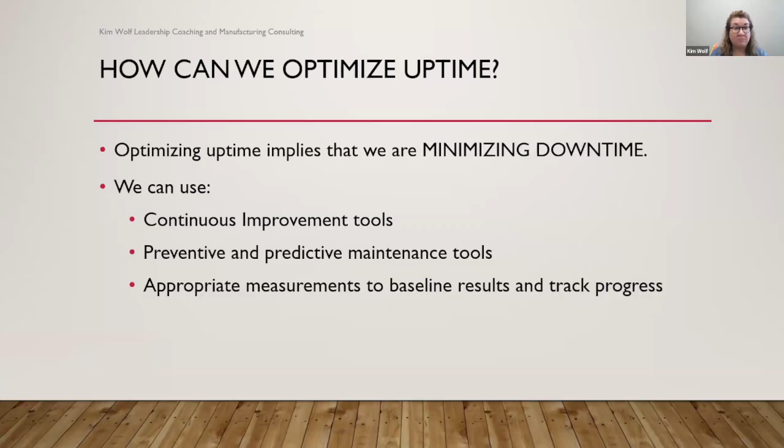I remembered reading in MRO magazine a few months ago that 68% of businesses in Canada experience unplanned outages at least once a month. And the value of that costs Canadian businesses about $242,000 per hour. So that shows you how impactful downtime can be.

In that same article, which I have a link to here on the presentation if you want to go back and read it again, it talks about industrial businesses needing to aim to really get rid of that high-risk run-to-fail maintenance approach that so many of us still use, and go to more of a long-term strategy. You're going to improve reliability, business reputation, and of course, ultimately make money. And that's what we're all here to do.

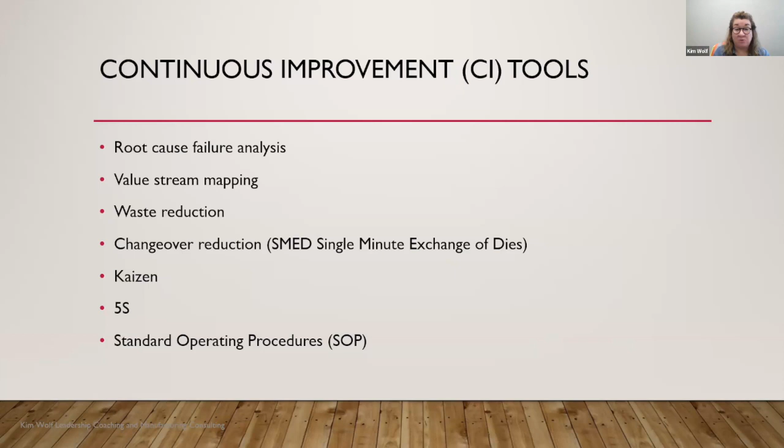Okay, so some of the tools that we're going to talk about today - again, I don't expect all of you to say, oh my gosh, I've never heard of that before. These are all tools that are very common and are out there, have been used for decades, but oftentimes we forget that they exist. I'd encourage you to think about, even if you're at stage 3 or 4, think about one tool that you think, that's something we haven't done in a long time, or that I'd like to try - I just need to get some focus on it to get it started. As we're going through these, think of at least one tool that you think you'd really be able to implement into your business tomorrow, and get started.

So root cause failure analysis, or RCFA, that to me is a very fundamental foundation tool that I have used for a very long time. And in fact, I've used it in my personal life for many years.

I have two grown sons who will tell you the story that when they were growing up, that word 'why' became a dirty word in our house because I just used it so much in asking them questions. And people, once you start using this thought process of the 5 whys, you end up doing it without even really thinking about it. It's absolutely statistically proven that once you get to that 5th why, that truly is your root cause. So many of us say, gosh, I got to the 2nd why, or the 3rd why, and I think I've got it. But when you look at it from maybe an outside perspective, looking in on those problem statements, those problems that have occurred, oftentimes you haven't reached that true root cause.

You think you've reached the answer that you thought it was going to be before you started the analysis. And once you really push through the entire process of the 5 whys, you can see that it may be something completely different than what you had originally thought of. And that's the beauty of RCFAs and 5 whys.

And then once you get to the end, asking, have I fixed it forever? Is there an opportunity for this problem, this issue, to reoccur? And if there is an opportunity for that, then maybe we didn't get to the true root cause, or maybe our subsequent action plan that we had isn't specific enough.

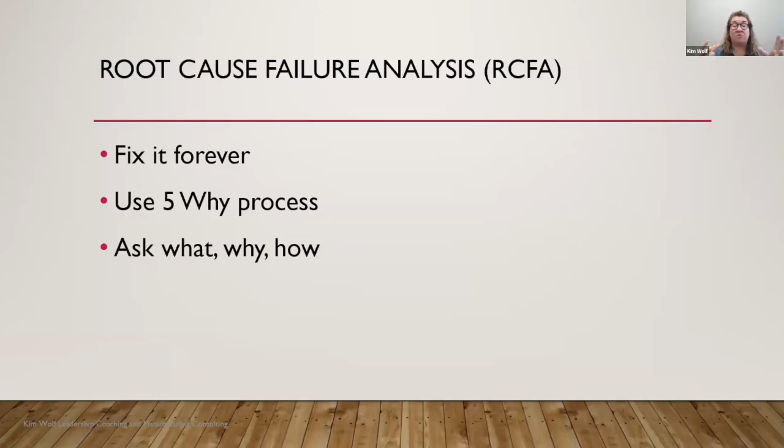I typically will set a parameter. It might be that you have an hour of downtime or more, or it might be 30 minutes, or 10 minutes. It depends on where your baseline is that you're starting. It might be that you have any quality holds or any safety issue that you have, you would do a root cause on. But you have to set those boundaries of when will you do them. Otherwise, you could do 10 of these a day, and certainly the impact gets diluted.

Part of the root cause failure analysis program is this proverbial fishbone diagram. I think most people are very familiar with this, and it's a very good tool to learn how to do it. Once you start doing them, you will think through all of these questions in your mind without even having to write it down or have a team meeting about it. For example, you would have product losses, some loss that you had, and then you would go back through and do all of your 5 bones on the fish. It helps you just to make sure that you didn't forget something.

It also helps you to make sure that you're validating the things that are not the problem. And so what's left, that's what you do your root cause failure analysis on, of course. But the things that are not a problem, it's also good to know that and to make sure that you can check that off as we're good with that.

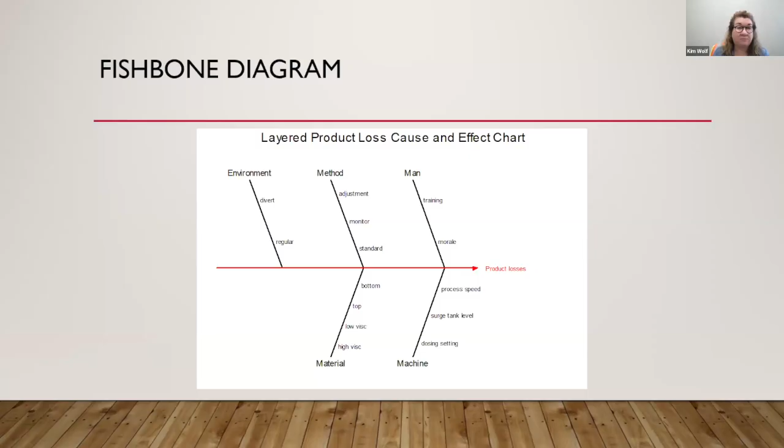The next tool we're going to talk about is value stream mapping. Really, value stream mapping is about optimizing your material flow. And it doesn't necessarily have to be raw materials - it could be a lot of different things. It could be people, it could be equipment, it could be actually ingredients. So we want to look at our entire supply chain, really.

I have one of the clients that I work with, and they are a large, almost like a millwright manufacturing shop. They were starting to do some work for a customer, point A to point B, but there were lots of times where they would have roadblocks that would come up and they would have too many of a certain part of the assembly in one spot, and it just shut everything down. There were other times in the process that things were so open that people couldn't - they were just waiting for something to come to them. So we did a value stream map on that.

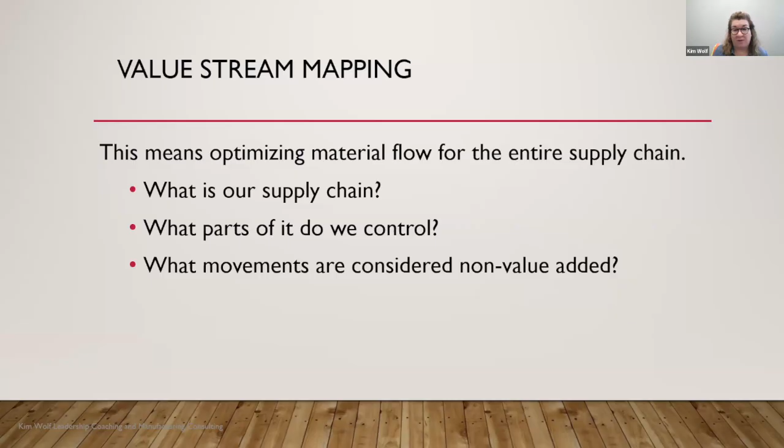And we looked at what are the things that we can control. Then we started to put emphasis on what are the things that are non-value add. For example, if you have a forklift that makes a trip from the warehouse empty, that would be considered to be a non-value added activity. If you're on the highway, your transport truck returns empty.

So when you're looking again at your entire supply chain, that would be something from a transportation perspective that you may want to investigate. Or let's just say that you have a maintenance person that walks to the storeroom to get parts repeatedly, as opposed to having a world-class maintenance program where you have a work order planner in place and they have all of the parts gathered together and put in a bin. The maintenance person gets the work order with the parts and they've got all the tools they need. They go do the job and come back. So those are the types of things that you want to try to get to when you're looking at a value stream map.

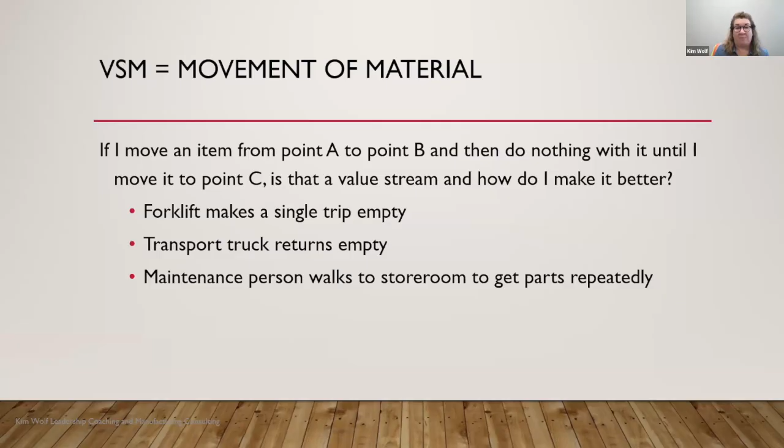So when we say movement of material, again, it doesn't necessarily always mean raw materials, but this exercise is really, really valuable, and I just can't stress that enough. I feel like oftentimes we make assumptions about how a process works. When you actually validate that and start to document that process, you realize that, gosh, things aren't really working the way that we thought that they were supposed to work. The value stream map will point those things out and it will drive those efficiencies.

I remember a client that was a bakery. They baked bread, and I was getting a plant tour the first day. I walked into their spiral cooler room, and there was bread all over the floor, literally up to my waist. I was quite taken aback. They said, 'Oh no, this is all normal. This is just part of what happens. We get a jam up there, and because there's no place for the bread to go, this is just what happens.' And I thought, oh my goodness, we're accepting that as just part of the way we do business, just part of the cost of doing business.

So I really challenge those types of assumptions. Is it possible to eliminate all waste? And the answer I would say is yes, even if you're taking what's considered to be sub-quality and selling that in a different way.

For example, I was out in California on vacation a few years ago, and we went through the Jelly Belly plant, which was very interesting. I'd never been through a jelly bean plant before. One of the things they do is, at the end of the tour everybody goes to the gift shop, and they had a huge bin of what they called Belly Flops - seconds, basically jelly beans that didn't meet the quality specs for their first pass quality.

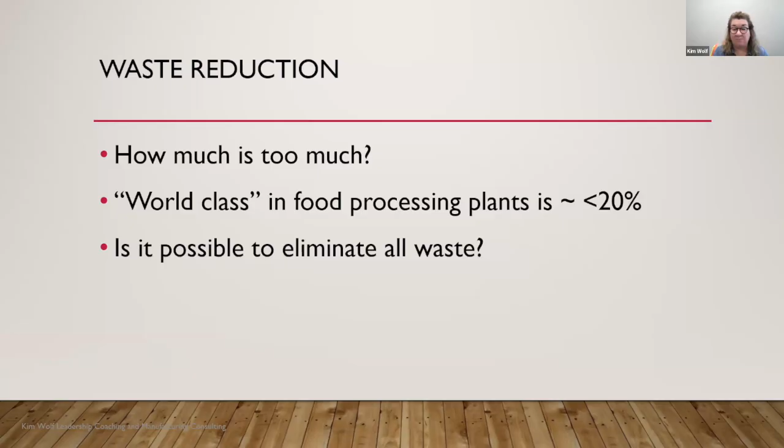Changeover reduction - this is, I think, the engineer in me. I love this tool, the single minute exchange of dies. When I was designing equipment, it was something I always had in my original design: how can we make the changeovers, whether a bottle size change or any kind of unit size change, faster. For example, you may have conveyor belts with guides on the sides, and instead of loosening bolts - I call it the tap tap method, where you're just kind of squeaking those sides on your changeover - you would actually have a quick-release mechanism and then off you go. It really helps reduce changeover time and makes them much more efficient.

So if changeovers are just part of what you have to do in your business, reducing the number of changeovers you do can certainly have a significant impact. But sometimes, based on customer requirements or equipment capabilities, we have to do these changeovers, so we have to get good at doing them well. The SMED tool is extremely helpful, and I'd encourage you to look for those types of opportunities, because a lot of times they can be very inexpensive. They pay for themselves very quickly.

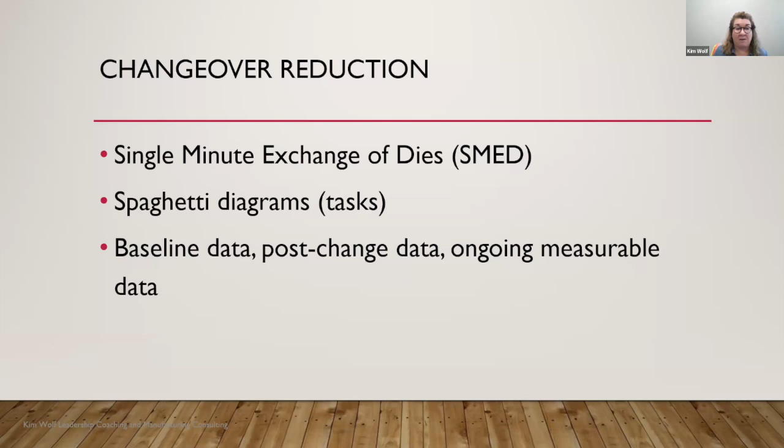Spaghetti diagrams, looking at tasks - changeovers are oftentimes very chaotic. If you do a spaghetti diagram, using just a regular video camera or cell phone camera, you can videotape an actual changeover as it happens, and you'll see people just moving all over the place. They might stand there and wait for somebody to do something else, then take off. As opposed to understanding how long that changeover should take, assigning everybody specific tasks, assigning them a time frame to get those tasks done, you want the tasks completed in a certain order so everybody's being used most valuably. So changeover reduction using tools, as opposed to just saying 'do better, do it quicker,' can be very effective in reducing your costs and reducing your downtime.

So Kaizen, I mentioned that just a few minutes ago. I'm a big believer of Kaizen. In fact, I just led a Kaizen event last week for a client I'm working with. It can be extremely intense, but also extremely impactful. For those of you who've done them before, by the time those 2 days or 1 week is finished, you can typically be very exhausted because it is very intense.

You'd start that event by setting a SMART goal. You'd make sure you've got cross-functional support there full-time, not people coming in and out, but people have set aside a full day. In some cases, I like to do maybe 3 hours in the morning, give people a 2 hour break where they can answer emails and do other work, then come back for another 3 hours in the afternoon. Sometimes you need to do that just to accommodate people's schedules.

But the Kaizen targets that you use, the processes you work on, are typically a little bit more complicated. It might be something like a weekly team meeting - if you think about it, the first 10 minutes of that meeting you're kind of catching up to where you ended last week. You lose some time doing that, but with less complicated issues being worked on, that might be perfectly fine. A Kaizen is when you don't want to think about anything else. We have to go from one thing to the next in order to really solve this particular issue.

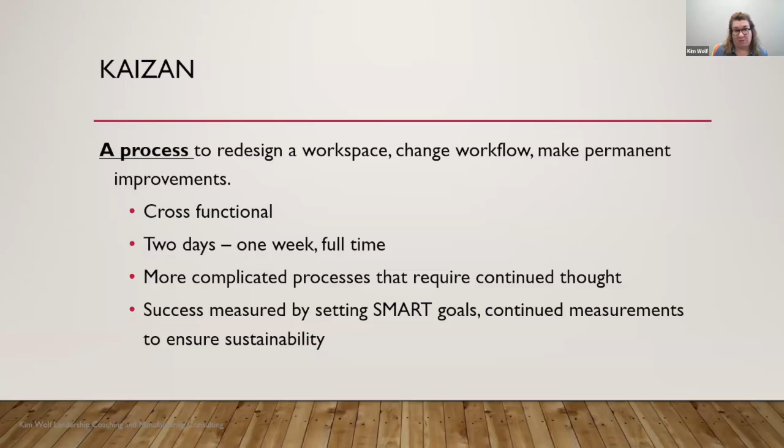So the Kaizen really is about being in the actual place. Yes, you're going to have some time in a conference room, but you're going to have a lot more time out on the production floor where the issue is happening. It might be at receiving, shipping, the maintenance shop, your packaging area, your baking area, whatever it is. You'll spend a lot of time out there because you're actually making the changes right then and there. So it's very timely.

And you're going to use facts and data, just like we do with all of our continuous improvement efforts. I put this - don't be a bull in a china shop - because you really have to be careful when you do a Kaizen and you're moving a group of people out to the floor to work on something. It can appear to the people in that area: oh my gosh, this huge group of people coming out with clipboards and stopwatches, what are they doing, why are they doing this, how is this going to impact me? So making sure you're communicating well and planning that event is very important to the success of a Kaizen.

5S, I'm going to go through this fairly quickly, but it's worthwhile to mention because many companies I work with, I'll ask, do you have a 5S program? And the answer is yes. When I do a plant tour, I'll see the paint or tape on the floor where the garbage cans are, and I'll see some shadow boards or cleaning tool hangers on the walls.

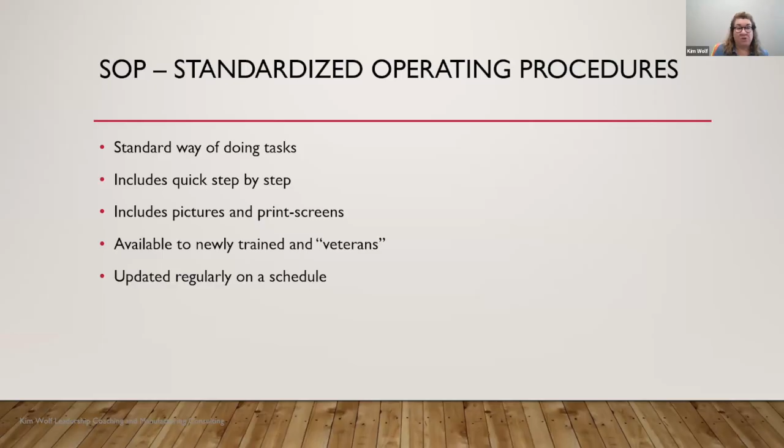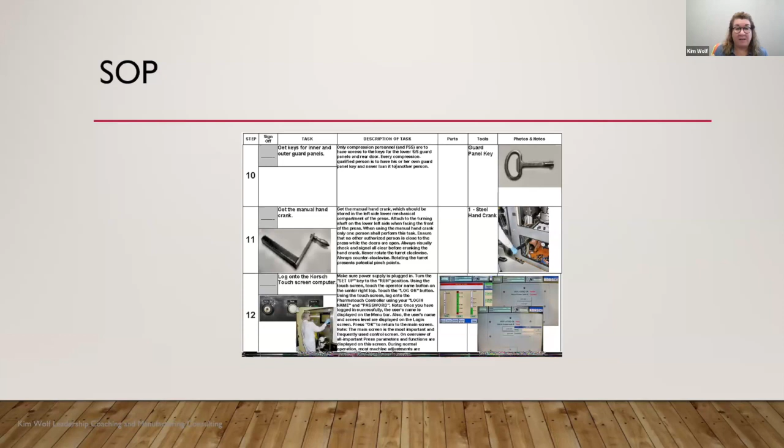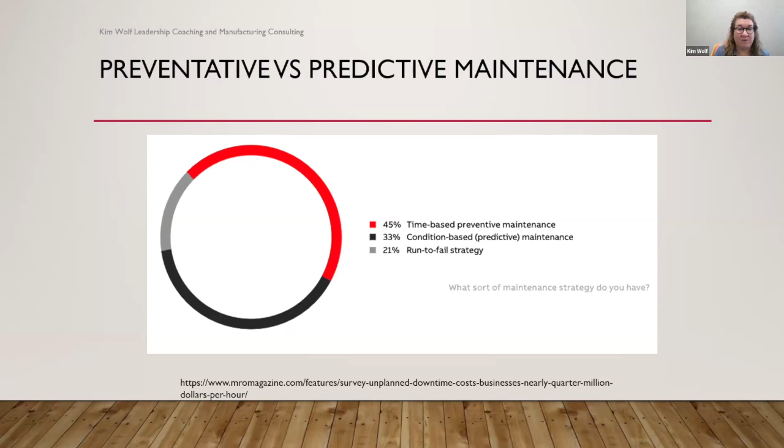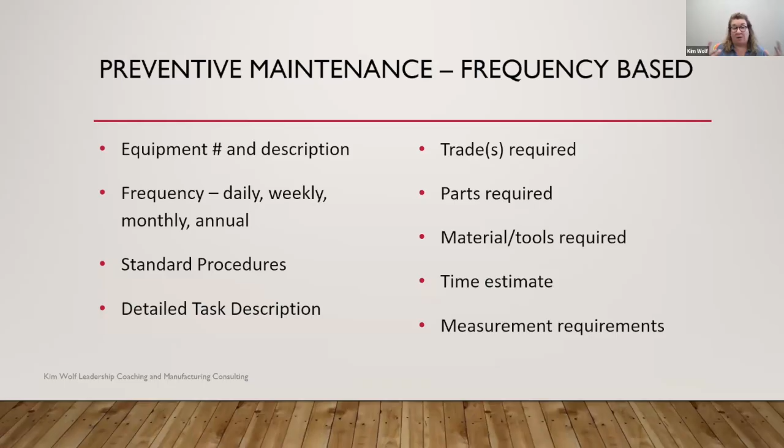So that's preventive maintenance, and again I do think it is better than nothing, but the best is predictive maintenance, in my opinion. You're only replacing that part when it is needed. So you're going to take a measurement—let's say it's replacing a gear, your maintenance team would be measuring the ID of that gear, the shaft, to see when it is worn enough that it starts to wobble on the shaft, and then that would be the time you would replace it. So that would be an example of predictive maintenance.

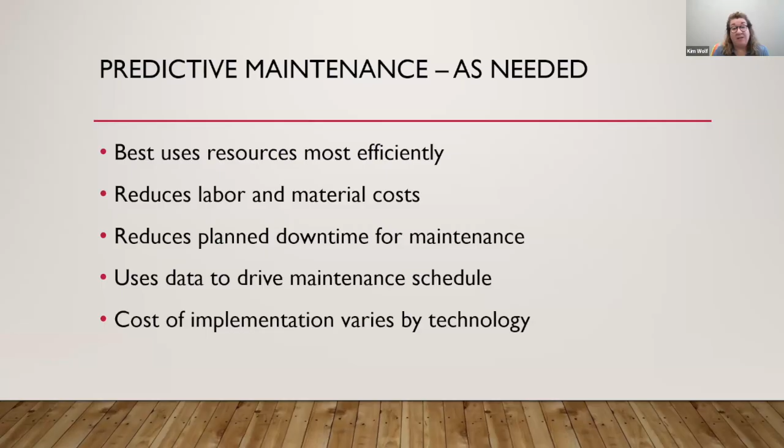You're using data to drive when you're actually going to be doing certain tasks. The cost of it can vary by what the technology is. I've got a slide here that shows which technologies—thermography, oil analysis, vibration analysis, many different tools—and the application for those. So how are you going to use those when you're looking at an electric motor? Which of those tools can you implement? I always find that oil analysis for me is a great one to start with if you've not started a predictive maintenance program and you're looking to do that. It's fairly inexpensive because you typically don't have to make any kind of a capital investment when you're doing oil analysis.

You are just taking samples and sending them to an outside lab who would then run the analysis for you and send back graphs that show particulate matter, contaminants, viscosity, and things like that. In thermography, right away, they will hire an outside company to come in and do that for them. So the investment could be fairly low, but the payback on all of these predictive maintenance technologies, the ROI on them, is very quick.

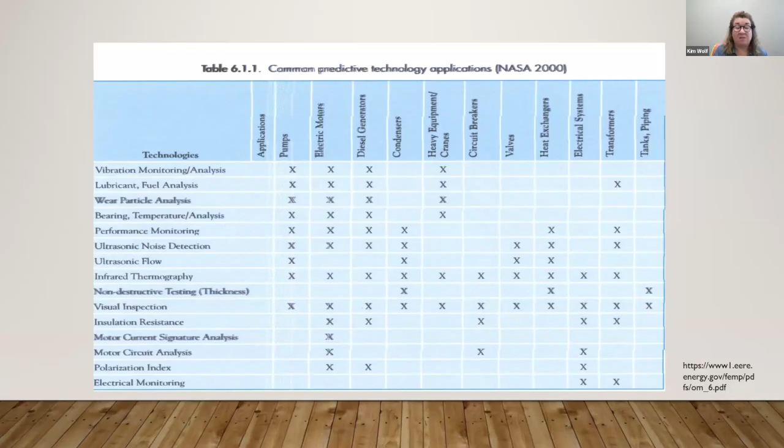So once you feel like you've got a good handle on your preventive maintenance work orders and that process, migrating into predictive maintenance can be a really quick transition once you've got that fundamental baseline for your preventive maintenance program.

So I'd like to ask another question: how is your company measuring downtime and uptime? We're going to talk a little bit now about measurements and how to do it. Do you typically use efficiency calculations, OEE? Are you not measuring it at all currently, or using some other method? Take a minute and talk about that, checking off where your experiences are currently.

Okay, let's take a look at our results now. So many of you are using efficiencies. OEE is great, I'm really glad to see that. We've got one company that's not currently measuring it, and that is not uncommon at all. And then we've got a couple of other technologies being used, and that may be industry-based or focused, I'm not sure. But we'll talk a little bit about efficiency and about OEE today.

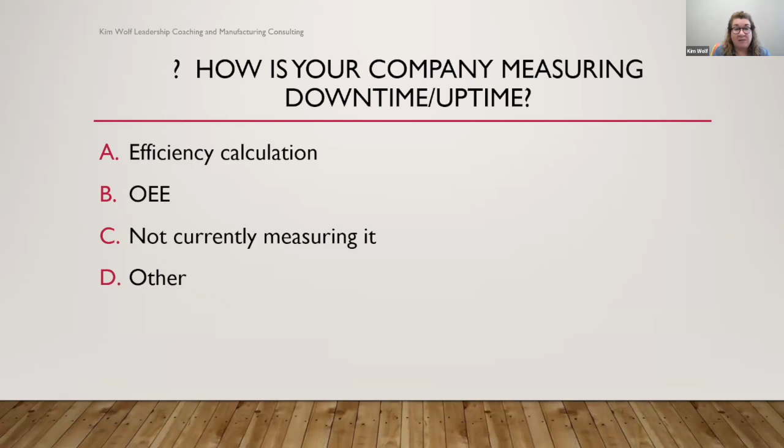So your efficiency calculation, again, it's better than nothing, better than not measuring. The problem I have with efficiency is that it can be easy to manipulate. We oftentimes dismiss issues as just part of the way we do business. So we may say, oh well, yes, we're going to shut down for lunches and breaks on the line, so that's just part of business, there's no need to measure that. You will not capture things like that in your efficiency calculation, because you're typically calculating based off of how much time are we scheduled to run versus how much time did we run. That's really what efficiency comes down to.

It doesn't take into account, though, the planned versus unplanned downtime, because in some cases your planned downtime, like lunches and breaks, can erode over into becoming unplanned. So if you had 30 minutes down for a lunch break, but by the time the operators start wandering away from the line and they stop and talk with their friend on the way to the cafeteria and have lunch and then meander back, the 30 minutes is really 40 minutes. So what you had dismissed as lunches and breaks, all of a sudden you're not really taking into account the opportunities you might have to make some of your planned downtime even more efficient.

Efficiency calculations can encompass labor, waste, and inventory, which is, again, a good thing.

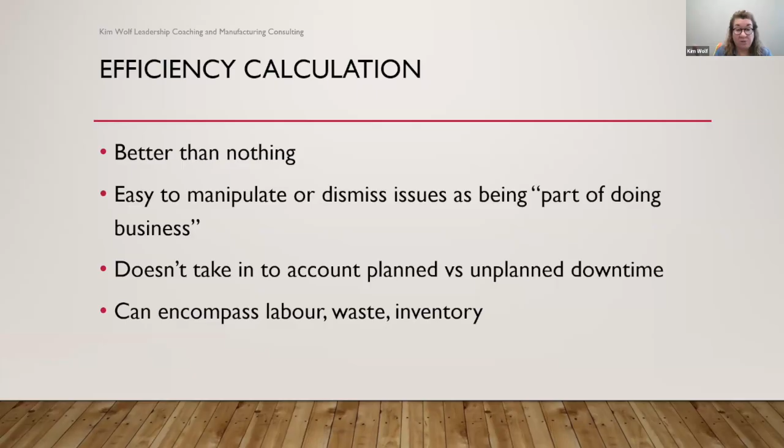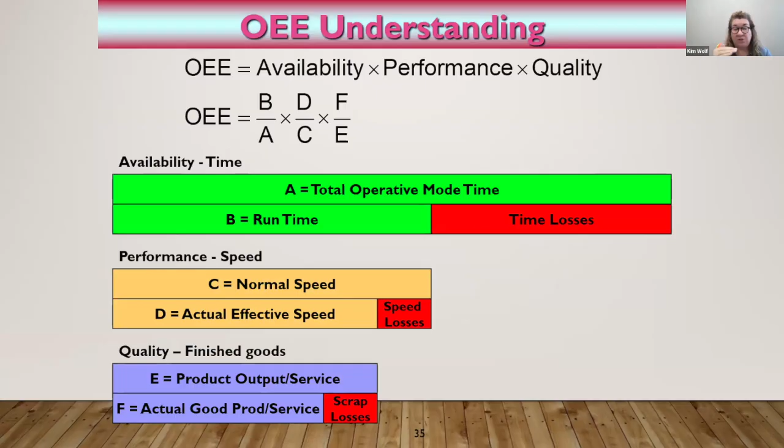OEE, on the other hand, takes into account a lot of those things. I really like this chart because it's very easy to explain what each of the components are for OEE, and we'll go through those.

So when you look at planned downtime, things like I mentioned, lunches and breaks or meetings, shift changes, changeouts or changeovers, planned maintenance or PM time, CIP or SIP for those of you in the beverage industry - those would be considered planned downtime.

Unplanned downtime would be breakdowns, jams that you might have, maintenance extensions - if they're in the middle of doing a PM and they say, oh my gosh, while I'm in here I'm going to do these other things because I see them. Waste or rework, any kind of adjustment to pieces of equipment - I know many of us at the end of the day are like, oh my gosh, what happened to my results today? And until you dig in, you don't realize the operator just turned the speed down, either accidentally or thinking they were doing the right thing. So those would all be considered unplanned downtime.

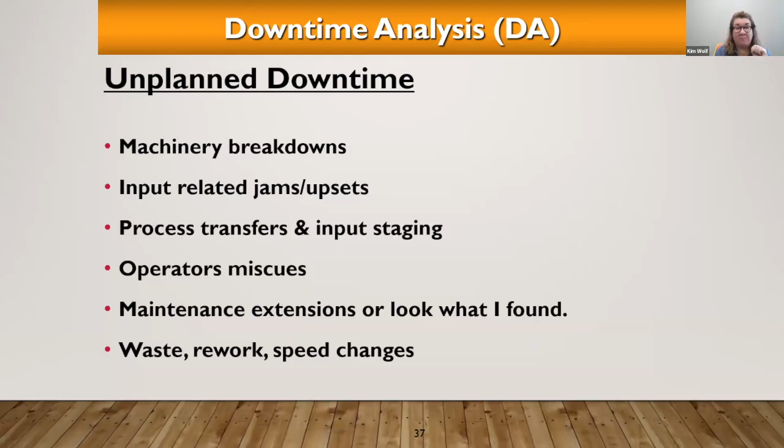So downtime loss examples for our OEE calculation would be some of those things I have here, even things like startup time.

One of my clients, I recently helped them implement a regular, very simple whiteboard at the beginning and end of their line, where they were keeping track of bottles per hour and cases per hour. There was a very clear trend as they started filling these in every hour, that the first 2 hours of the shift every day were always in red. They never met their goals, and it's because of that startup time. So now we know what to do, where to focus. If you're just looking at one number at the end of the day, or worse, at the end of the week or month, it's sometimes difficult to identify things like that.

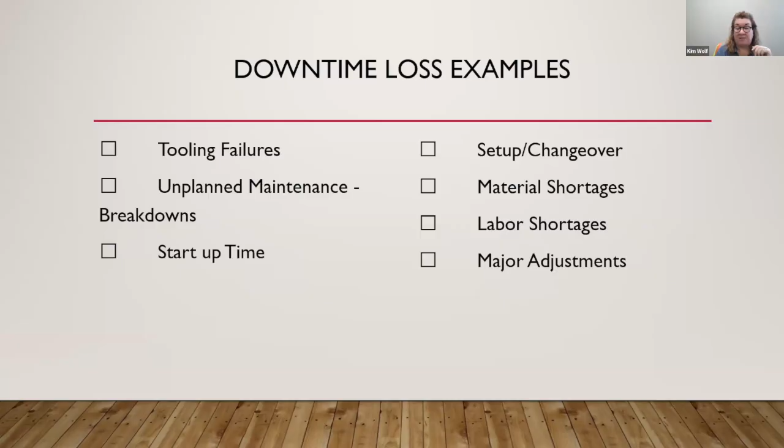Then you've got availability. Availability with the planned and unplanned downtime, like we just talked about, but there's also the people factor - breaks for people or fatigue factors. Do you find that as the shift goes on, maybe running a continuous 24/7 shift with 12-hour shifts, the last 2 hours people are exhausted? Do you time washroom breaks? It seems like a silly question, but are you having breakdowns or downtime because of washroom breaks? Perhaps. If so, how can you manage that a little differently? And who decides what you're going to measure? This part of the OEE calculation, the availability part in regard to people, can be a little more subjective than when it comes to equipment and machines.

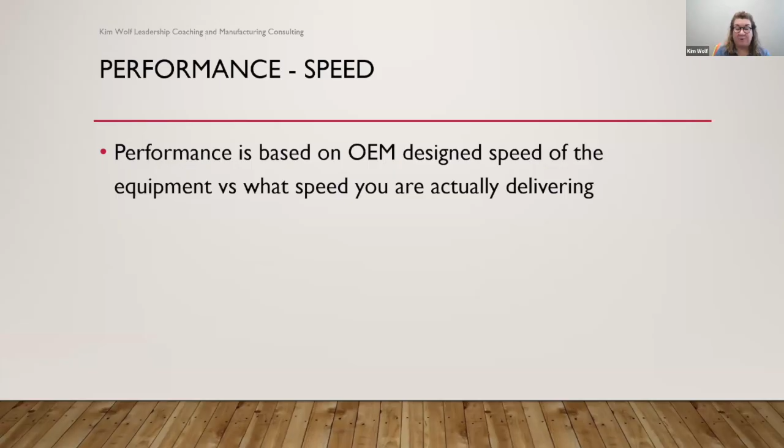Then the performance piece of OEE. That's based on the OEM design speed. A lot of times we say, oh, we're running 100 bottles a minute, whatever it might be, and in reality that equipment was designed to run 150 bottles a minute. So it's the 150 that you need to use in your calculation as your baseline. If you're only running 100, you've got upside obviously, and that will show up in your OEE calculation. Having standards for everything, knowing what those standards are and making sure they're clear and that everyone's using them - for example, that bottle calculation I just shared. Some of your performance loss examples: things like a sensor might have been blocked, or you might have had equipment wear. Those are the types of things you'd want to investigate, and they will show up again in that OEE calculation.

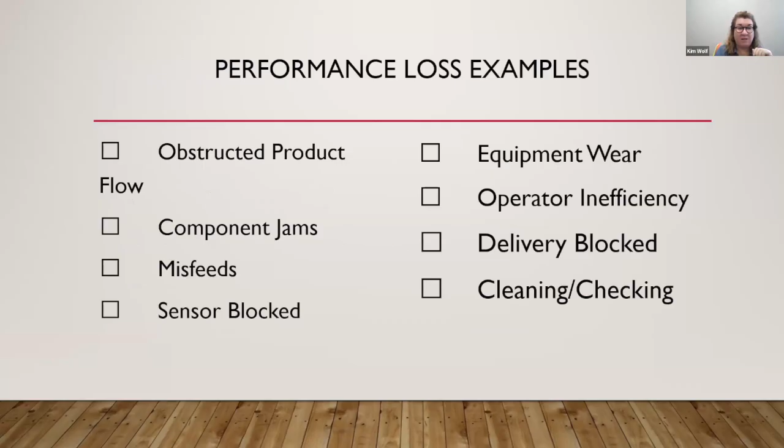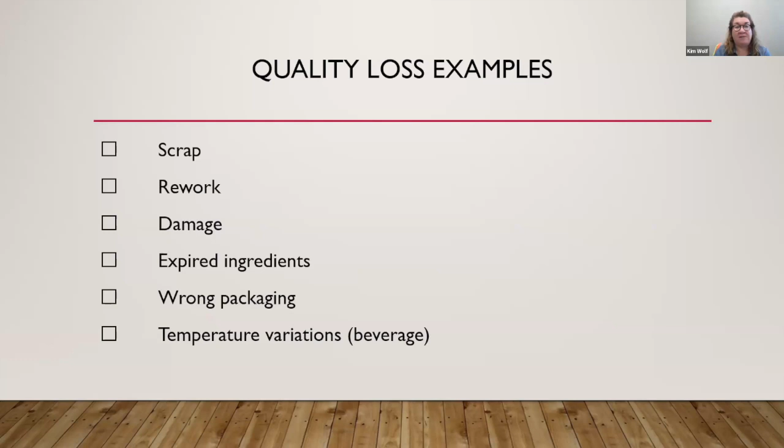And then the last part of the OEE calculation is quality in finished goods. First pass quality is the standard you're going to use. Any waste that you have on your finished goods is deducted, and that becomes your opportunity as it would show up as part of your OEE calculation. Here's some of your quality loss examples that you might have. If you're in the beverage industry, you may have temperature variation. So you produce good product, put it in the carton properly, then get some kind of downtime on the line, and now the temperature of that product has exceeded spec, so it becomes waste. That would be an example of a quality loss for OEE.

So when you do implement OEE, and for those companies already doing that, I'm sure you had to have somebody who drove it, who owned OEE. I think that's really important. It takes, in my experience, about 20% of a production or maintenance supervisor's time to be that champion of OEE. Driving it out to the floor is very important. That's why I like using those whiteboards. The first thing is keeping track of cases per hour. The next step will be having them start to keep track of the waste, and then they'll start to calculate their own OEE out on the production floor. That's moving up toward changing your culture - that's stage 4.

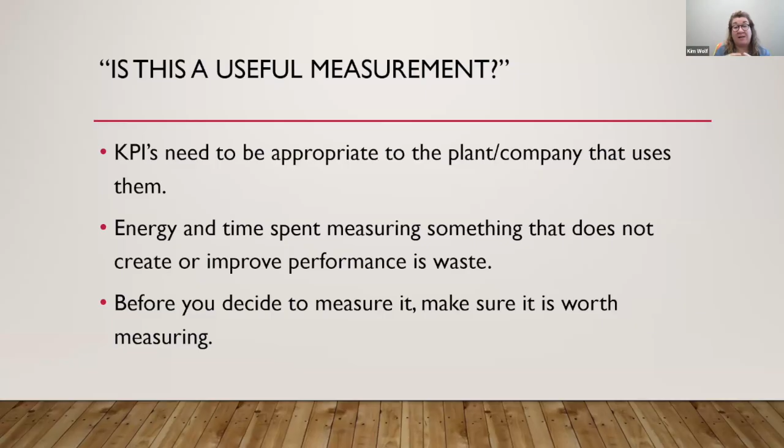So ask yourself about the things you're currently measuring: is this a useful measurement? If you're measuring efficiency, is it useful? Is it driving action? Is it driving results somehow? Before you decide that this is our KPI, really ask yourself if it's worth measuring, because sometimes it can take work to measure KPIs. And if it's just something going into somebody's computer or a spreadsheet or reported to corporate, but you're not really using it every day, I'd challenge you to ask if there's something else we could educate the people on the production floor about - how it's calculated and how it drives meaningful change at the facility. Some other KPIs you might consider are cost per case or labor cost per case. That is one thing OEE doesn't really touch on. So that might be another KPI you'd use to complement either your efficiency or your OEE.

I will finish up by saying that maximizing uptime requires consistency. Those bullet points about people being too busy, not having enough people, not having a budget, not knowing how to do it—I would challenge you to say anybody can use these tools. Anybody can put a predictive maintenance program in place, and anybody can make sure they're measuring the right things and using that to drive decisions every day. Don't get sucked into thinking you're not big enough or don't have the resources. Challenge yourself to pick one tool you heard today and say, that's the one I'm really going to go after.